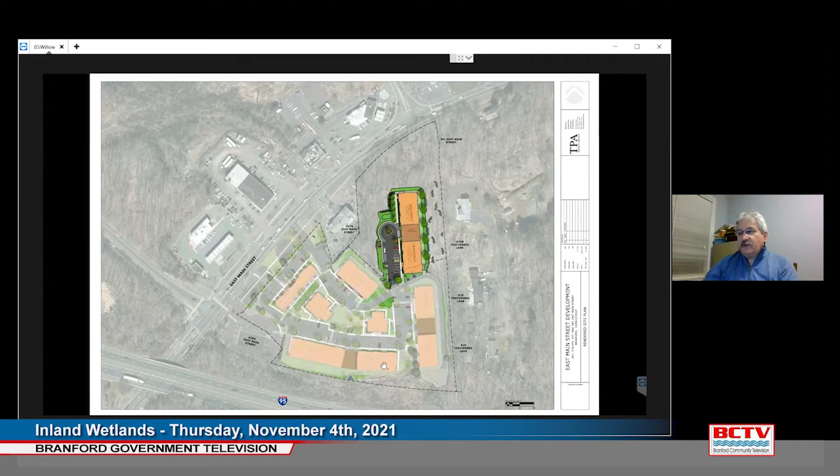Just so you have an idea of where things stand, Building A, which is parallel to Route 1, is substantially well along. Building B behind it is out of the ground and being framed up, and they are doing site preparation to get ready for Building E. The existing remainder of the Days Inn is still present along the wetlands on the southerly side of the lot. There's not going to be demolition of that until they get a little bit farther along.

So the reason that we're here before you, this is an expansion of the project. It does represent an additional disturbance of roughly 1.16 acres. The majority of it is on the 383 East Main Street lot, with a small portion on the 375 East Main Street lot to facilitate the driveway connection and a portion of the building.

There's no plan to further develop the site. The northerly portion is very steep, very rocky, characterized by very shallow ledge and bedrock throughout the property. The feasibility of a roadway connection onto Route 1, and the extensive amount of rock removal that would have to be done to do any further development, really preclude anything else. It would take heroic measures and high costs to do much more with the property. So this is pretty much where the developer expects to go with the project, and hopefully you won't see me back here again about this anytime soon.

One other minor matter I want to point out: as part of the review process with the DOT to obtain a permit from the Office of State Traffic Administration and the local district, they are requiring us to install a right-of-way fence along the southerly limit of the property. They had originally asked that it be on the property line. We pointed out that that would push it directly through the heart of the wetlands. They have agreed that it can go along the limit of disturbance along the southerly portion of the lot, and it will not represent additional disturbance activity because it will be installed within the limit of the previously approved clearing and disturbance area.

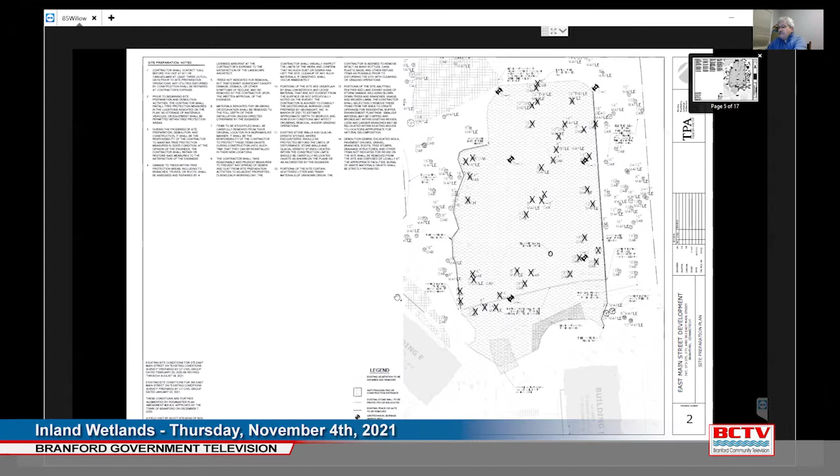That's correct. What we're proposing, there's going to be a gate right at the outlet, the level spreader, the energy dissipator for the stormwater system, so that they can have access to clean it out. The fence will wrap around the energy dissipator instead of cutting across it, so it doesn't have trash or brush or anything else causing problems.

The other gate is just off the screen. It's near the area where we'll be removing an existing pipe discharge into the wetlands and doing a wetland restoration, so that they'll have access to the wetlands for maintenance, but also to monitor that area until it's well established.

Mr. Sacco: building F, what is that hashed area to the left of building F, the top one, this area up here? That's exposed ledge, an extensive area of exposed ledge identified by the surveyor. Similarly, there's an area behind building E as well. It's a very rocky area. We're not proposing to do any disturbance in that area.

Mr. Sacco, Melissa Papantonis, Commissioner.

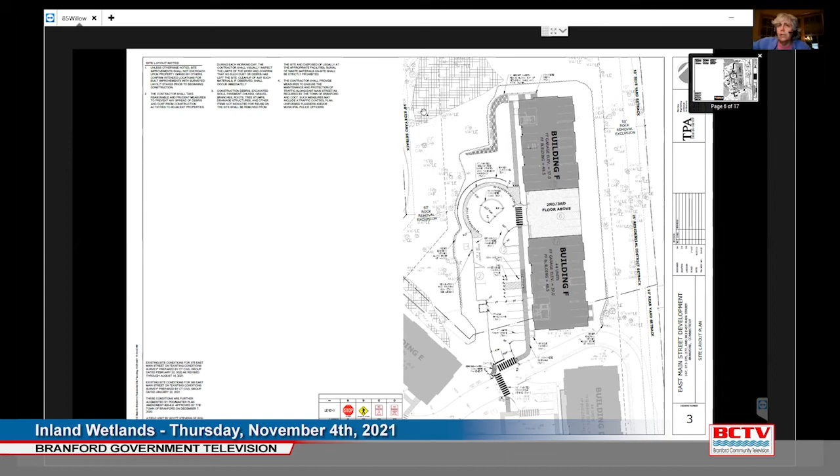The property where you're talking about the fence, the right-of-way, is that part of this lot? Who's the owner of the property with the right-of-way? The right-of-way is the Interstate 95 right-of-way. I understand, but the right-of-way runs over property that belongs to someone else, as I understand it. The fence will be built on property of the developer. There are two entities: Metro 375 LLC and Metro 383 LLC. They're under common ownership, so the fence constructed along the right-of-way is being built on land of the developer and under his control.

Okay, thank you. That was the compromise to allow us to build it without having an encroachment into the wetland. It seemed unnecessary.

Commissioner Bassman: the stormwater from building F is treated how? That's the next topic for discussion. What we're proposing to do, because the area of building F is largely underlain by shallow rock, it's a very difficult area to do any kind of stormwater infiltration. We are proposing one small rain garden. It's essentially going to capture runoff from really the lawn and the hardscape immediately in front of the building.

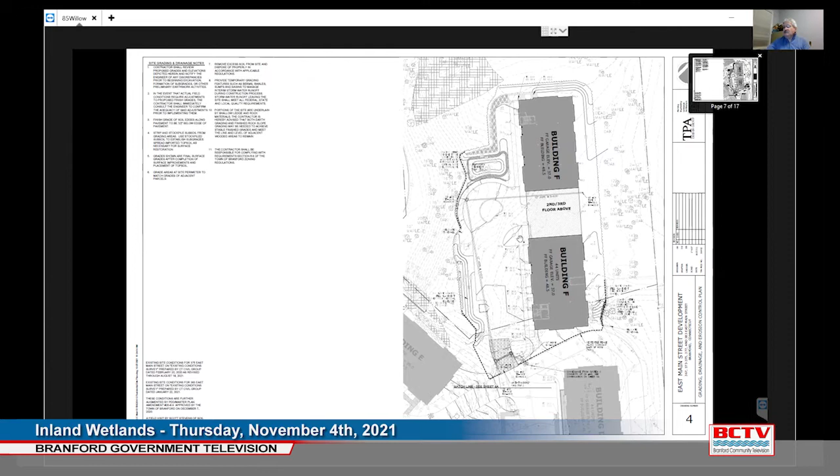So that's why, and really the main reason we're here before you for this presentation, what we're proposing is to put the stormwater into an area where it makes sense, an area where it realistically can be infiltrated. It can have the proper function in terms of the stormwater, and maintain minimal impact on the receiving water and the surrounding area.

Commissioner Bassman: does that larger number of galleries allow you to meet the 1 inch, first 1 inch of rainwater regulation? Yes, it does. For the entire development, the water quality volume we calculated is 20,715 cubic feet. With the additional retention volume, we would be providing a total of 24,504 cubic feet of retention. There is additional storage beyond that—12,000 cubic feet of detention where the water level rises and begins to overflow out the outlet. But in peaks during a severe storm, there will still be further attenuation because of the surplus volume. We're increasing the amount of retention from the original proposal by 4,400 cubic feet, more than accomplishing what is required under the regulations.

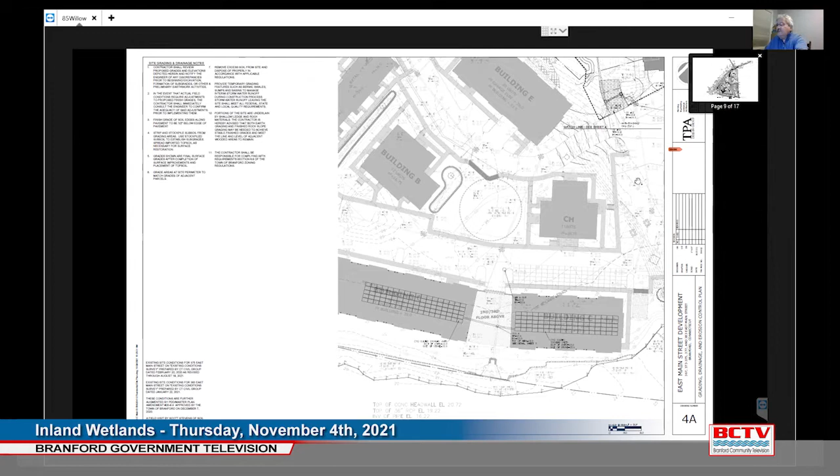Just to follow up on that quickly, I wanted to point out this is the existing pattern of where water goes, not only from the original development, but from the new lot. Things get a little more complicated because a portion of the 383 lot has been draining down into the wetland anyway. A small portion in the center drains to the car wash lot, entering the storm drainage system there and onto Route 1. The northerly portion of the site drains directly to East Main Street, entering the stormwater system. It all ends up flowing to the Branford River through this stormwater discharge from Route 1.

This is the breakdown of the proposed areas. Essentially, a slightly smaller area is going to the car wash, so we have less runoff reaching that lot. The area going to Route 1 is nearly identical, very little change there. A small additional area where the north end of building F and the turning area is being added flows south into the storm drainage system through the retention area and into the wetland south of the site, which then overflows back into Route 1 and again toward the Branford River.

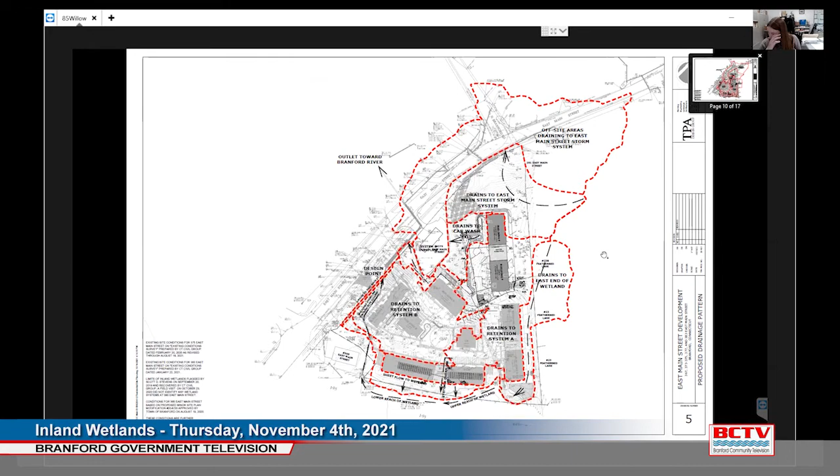Jamie Frederick, the wetland agent: I just want to mention that the fee was based on the additional area of disturbance beyond what was originally approved in the first application, so the commission understands how it's been calculated. It doesn't include the total area of all the new activity. However, the area of new activity not included is an area that already had a fee paid for review of disturbance previously, and all the new area of disturbance associated with the project is beyond the 100-foot upland review area. So it seemed like a reasonable way to process the fee. However, it might be a slight deviation from the truest interpretation of the regulations. I just wanted to see if the commission had any feedback on that.

Melissa Papantonis, Commissioner: I'm sorry, it sounds like you were saying that. So if I understand correctly, the fee was calculated so as not to essentially double dip on the same property, but to apply the fee in a way that meets the purpose and spirit of it, without charging them for the same development on the same land twice. I think that's a fair way of surmising what I was trying to say. That makes sense.

This is David Sacco again. Just so you understand, the area for the fee calculation is based on this additional disturbed area right here around building F. It's roughly 50,500 square feet. So the fee previously paid was based on the disturbance throughout the remainder of the site, and the basis for this is now this disturbed area extending across both lots, predominantly on the 383 lot.

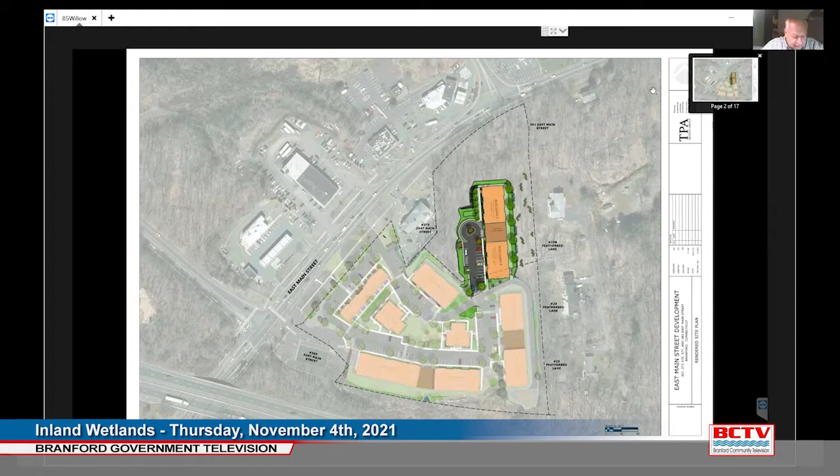Next up, Inland Wetland 211101, 3-7 Rockland Park, restoration of a wetland area and pond, including the removal of invasive species and the planting of native plants.

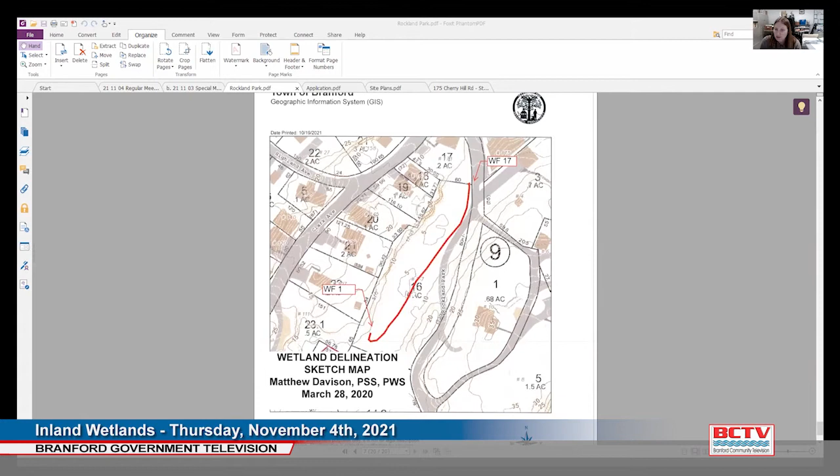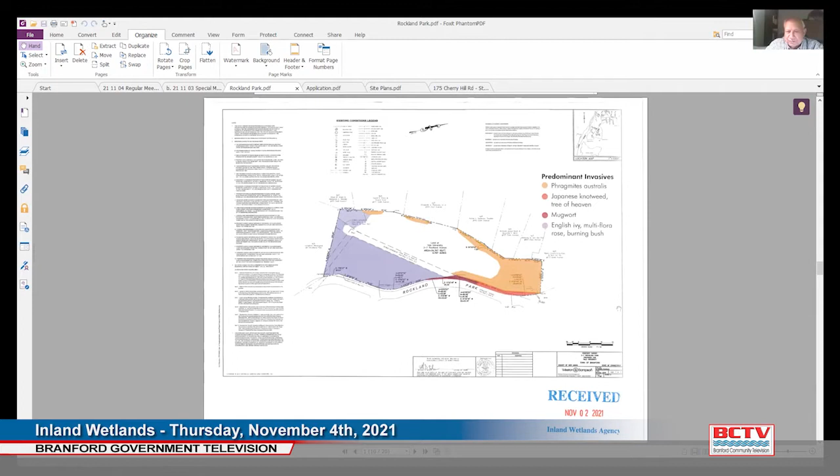Do we normally require delineation when work is going to be conducted that close to the wetland? Jamie Frederick, Inland Wetland Agent. In addition to confirming the extent of the wetland along the west side of the property, there's the question of whether or not the wetland delineation needs to be added to the survey.

The areas highlighted on the survey right now have been highlighted by the applicants as estimated areas of where the invasive species are and the areas that would need to be replanted based on that invasive removal. So the question is, do they need a more formal plan regarding the spatial aspect of what they're proposing to do, or is the information provided sufficient for the commission given the type of activity they're proposing to do?

The other question is that the fee is based off of the area disturbance in a wetland and the total area disturbance overall. So not having actual areas does make it difficult to calculate that fee. However, they have also requested a fee reduction, and the commission has had a past practice of reducing the fee on applications like this based on the environmental benefit of the application. I'm getting ahead of myself here, but they're all interrelated topics.

Commissioner Bassman. I think this is the kind of project we love to see taking place. Love the initiative behind it, the professionalism in which it's being reviewed. So to the extent there's an opportunity to do this at some kind of reduced cost or fee, I think we should seriously consider it.

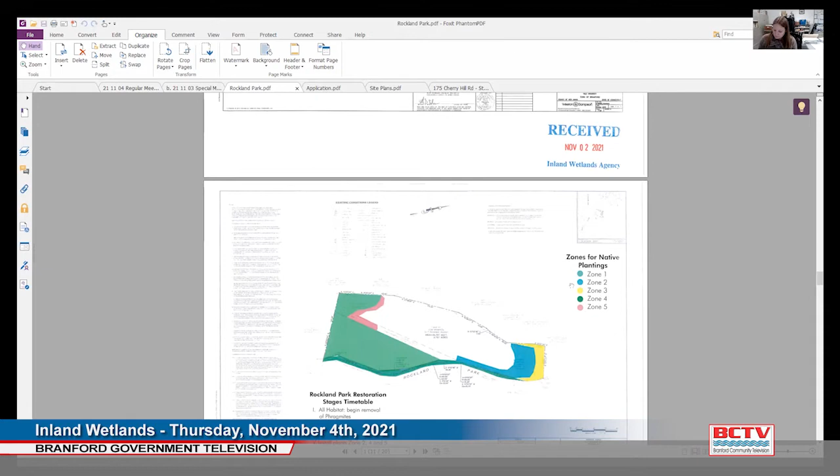Commissioner Bassman. I think what you're saying is for projects that are even conservation-based, we have a monitoring period that we look to be part of the project, and I would see this would be no different. Jamie Frederick, Inland Wetland Agent: in the past, the commission has taken the 5-year monitoring requirement for wetland mitigation and kind of applied that to these types of projects, sometimes reduced down to 3 years. Given the scope and size of this project, the 5 years would be appropriate, especially since there's parts of it that aren't going to start in year one.

Commissioner Bassman: if it was a fee reduction only, in my mind you'd wait until December to see that Mr. Davison has had an opportunity to delve into the project and specifically look at the plantings and the density of the plantings, et cetera, and then consider a fee reduction. But I think the issue of the delineation we're facing now, we can't wait till December for that. Am I correct on that, Jamie?

Jamie Frederick, Inland Wetland Agent: I'm not sure I understand the question. Well, if we're going to talk about a fee in December, we either have to have a delineation or not, and we need to make that decision tonight, not in December.

Correct. This is Commissioner Boda. I want to speak to that for a moment, because when we're looking at regulated activities that have a direct impact to the wetland, if we look at the state statute and the preamble of the purpose of the Connecticut general statutes around protecting inland wetlands and watercourses, it's all about foreclosing future benefit. So the function of the delineation is to ensure that we're not losing even by small cuts here and there. And this particular application, that's not what's happening.

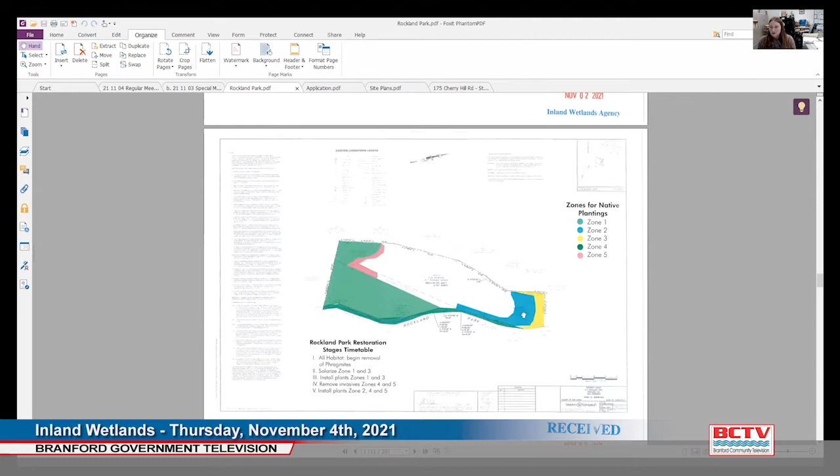Jamie Frederick, the wetland agent, says if the commission is comfortable, she can use the sketches provided by the applicant to calculate areas of disturbance. The applicant provided some calculations themselves, which she hasn't checked yet, but she could overlay the two plans to calculate the area of disturbance, and also use the wetland delineation to estimate how much fits in the wetland area.

Jamie offers that if the commission won't require a formal map, she has a high quality handheld GPS that's sub-meter accurate. She can collect points around the wetland and provide them to GIS staff to calculate the exact wetland area. It would be a fairly accurate representation, and from that the commission could subtract it from the overall property.

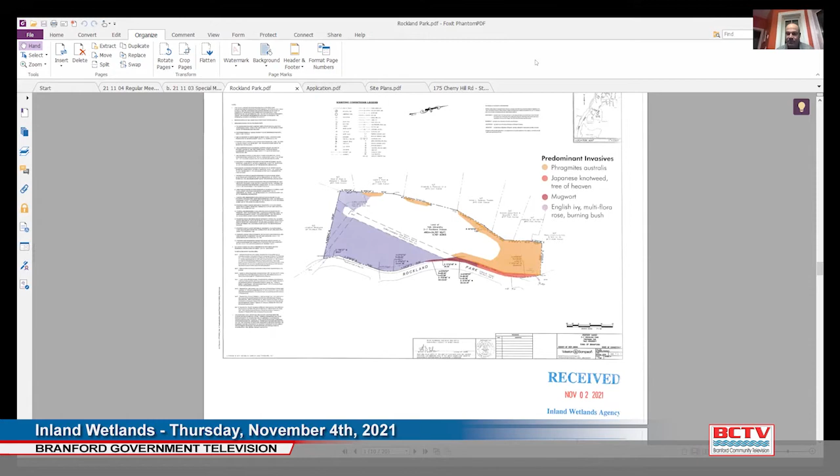Jamie Frederick says that sounds like a plan and would be helpful. Commissioner Papantonis agrees that sounds like a pretty reasonable solution.

Anything else on this project? Shirley, do you have another comment? No, my hand's still up there for some reason. Right, let's see if I can lower it for you. Thank you.

Any other comments from the commission? Again, Mr. Davison, thank you for the work you've already put in and what you've volunteered to do. It's certainly heartwarming to see that kind of participation.

Just want to thank the commission very much for the conversation and for the consideration. Yeah, thank you so much. You're quite welcome.

Finally, for applications for receipt: Inland Wetland 211102, 140 to 240 Austin Ryer Lane, DO 503-001C, the repair and replacement of a drainage outlet.

Jamie Frederick, the wetland agent, explains this application was submitted in response to a notice of violation issued due to corrections needed to a drainage system. The application came in late yesterday afternoon, so she hasn't had much time to review it, but the applicant is present, so she'll hand it over for the initial presentation.

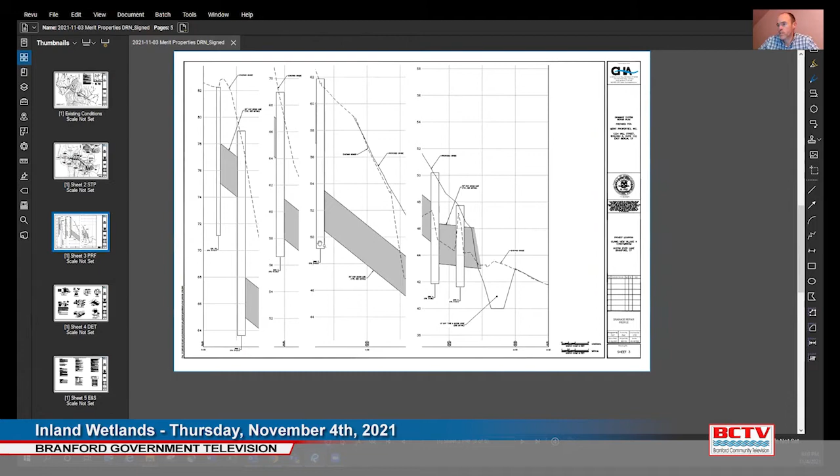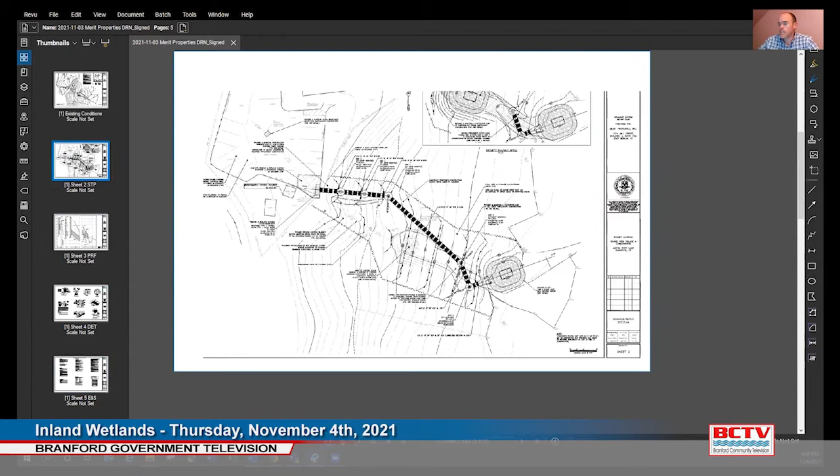And then just some standard details, catch basin manholes, the scour hole itself, and then notes regarding construction sequence, erosion controls required, and that sort of thing. It's reasonably straightforward, just a repair of an existing drainage system. If the commission has any questions, I'm happy to answer anything I can.

Commissioner Bassman: When would you look to do this activity? Obviously it's something that needs to be repaired. So it would be ideal to get this done over the winter when we're not anticipating any rain events that would make it more difficult to install this drainage system. Other than that, you'd probably want to stabilize it for the spring and then do it in the summer. But that's going to be dependent on how we get approvals and the funding end of things from the homeowners association.

Jamie Frederick: Jen, are you going to be able to access the site to do the work from this edge of the parking lot, or are you going to have to approach differently? We've walked this through with a couple of the contractors we work with regularly. It's certainly going to be a challenge, but rather than creating a bunch of additional disturbance cutting a road in from the side, working their way down the slope with excavators and heavy equipment is probably the best way to do this, even though it's going to require moving material twice to step it down the hill.

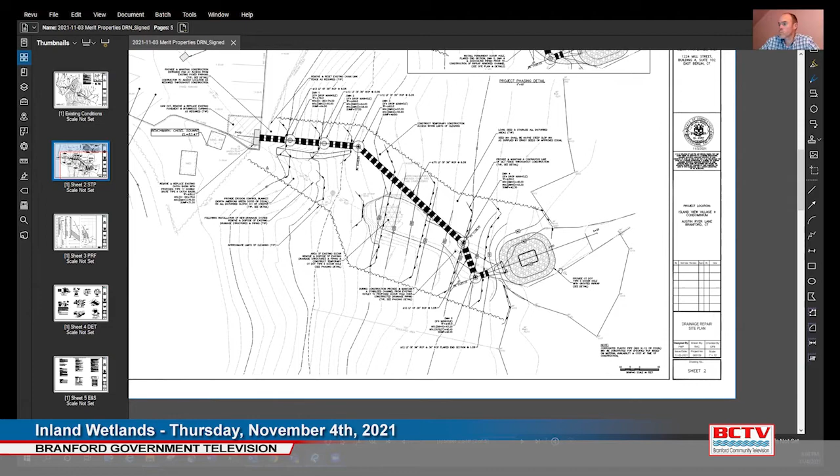I'm assuming that's the activity seen here within the intermittent water course. Actually, the direct wetland impact is just a little bit of grading here where the wetland pokes up in. So you did not include the activity within the intermittent water course in that calculation? No, we did not. I think that it should be revised to include the intermittent water course because that's considered a regulated resource. Okay.

Which is a bit of a catch-22 because I'm sure it exists in part because of the structure. Right, it only exists because of it, the outlet won't really exist once you've revised the outlet location.

Does the commission have any difference in opinion from what I stated before the applicant revises their calculations and submits the additional fee?

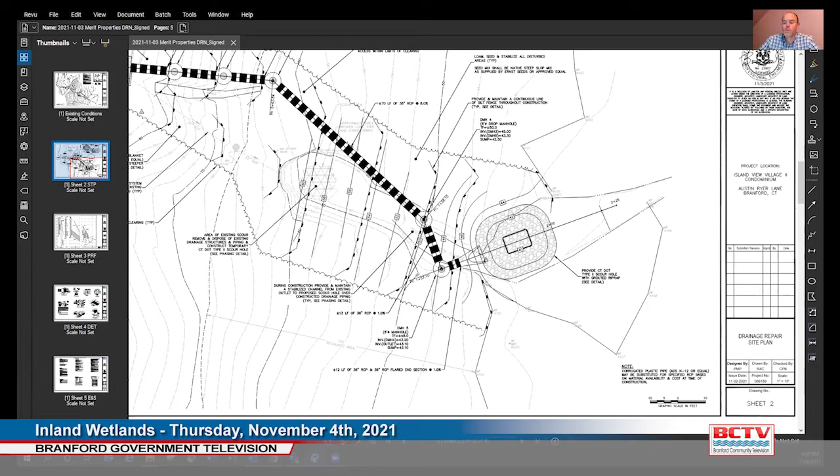Applications for review: inland wetland 210801, 175 Cherry Hill Road. It's an 11 lot subdivision. We have a fee assessment review for that application.

Jamie Frederick, inland wetland agent. Just to remind the commission, the fee review is relative to whether this application is a subdivision application with regulated activity or a subdivision application without regulated activity. Recently, the commission has been looking at subdivisions as subdivision without regulated activity.

So the application has been submitted as a subdivision with regulated activity, which I believe is the appropriate way to go. However, I want to make sure we're being consistent with practice and treating everyone uniformly and fairly. If the commission determines it's subdivision without regulated activity, the practice has been to make certain lots come back for individual approvals.

And at that point the fee would be reduced to $110 rather than, I believe, about $9,000 that has been submitted at this time. So I don't know if the commission wants to be refreshed on the application prior to further discussion, but I wanted to explain the fee situation before we dive into everything again.

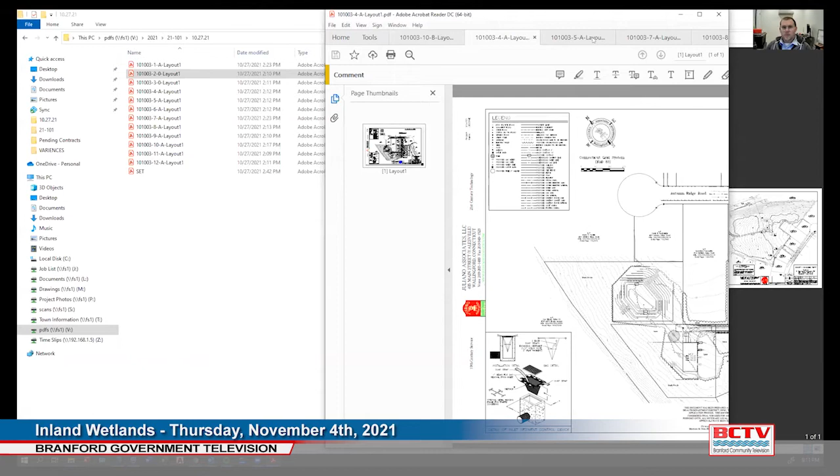Okay. Oh, can't do that. Okay. Can everyone see that? Yes.

Good evening, ladies and gentlemen. My name is James DeMeo from Juliano Associates. Our address is 405 Main Street, Wallingford, Connecticut. I'm here representing BC Investment Properties, LLC. As previously discussed, this is an 11 lot subdivision.

To quickly go over it again, I don't want to dive too deep since we already talked about it in previous months. It's an 11 lot subdivision, mainly coming in off Autumn Ridge Road, developing a new right-of-way and roadway. It's broken up into two sections based on grading and what fits on my plans.

The first section is lots 1, 2, 3, 10, and 11. This is pretty much the highest elevation on the property, so actually the elevation will go up from Autumn Ridge. We have a series of catch basins and a pipe network that will capture the water from the upper lots and send it to a detention basin, which I call the northern detention basin.

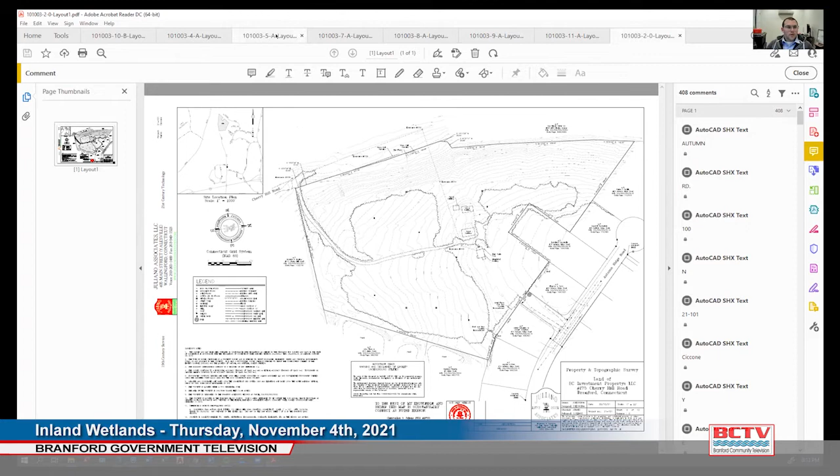However, we have Autumn Ridge here, Cherry Hill up here on the western side of the property. We have 3 small ponds in this direction, and there are wetlands to the west of the property, but those are a few hundred feet away, at least 500 feet from the property. There's additional space in between disturbances because we're not developing all the way up to the property line.

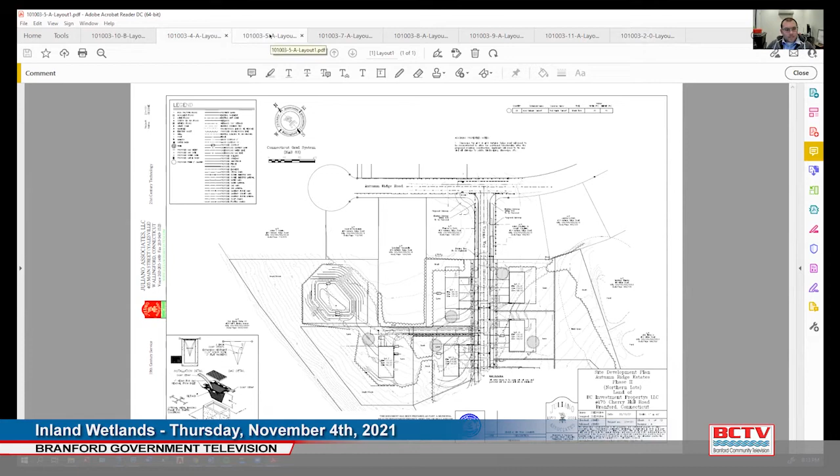As per previous comments with town staff, storm drainage was reevaluated. Perc tests were done in the areas of the detention basins, and the NOAA Atlas 14 rain data was used. And what ultimately that did was...

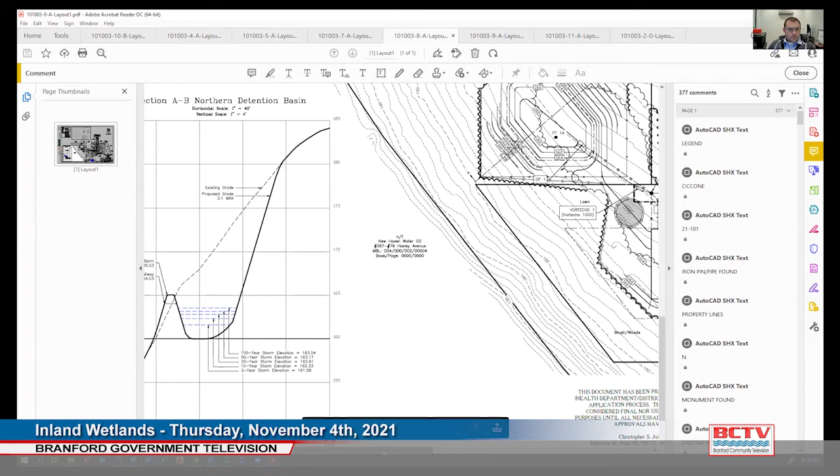This system, the northern detention basin, at the 100-year storm elevation, is holding all of that. There is an emergency spillway at 164.03. At the 100-year storm elevation, it's 163.54. So we have almost half a foot before it even comes out through the emergency spillway during the 100-year storm.

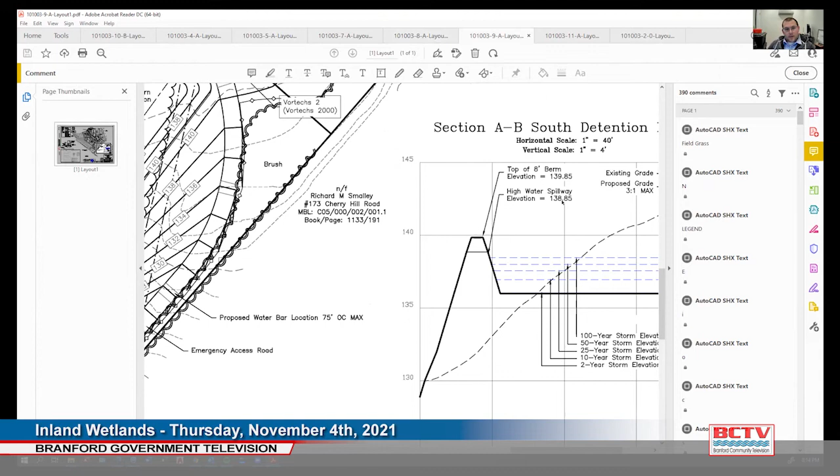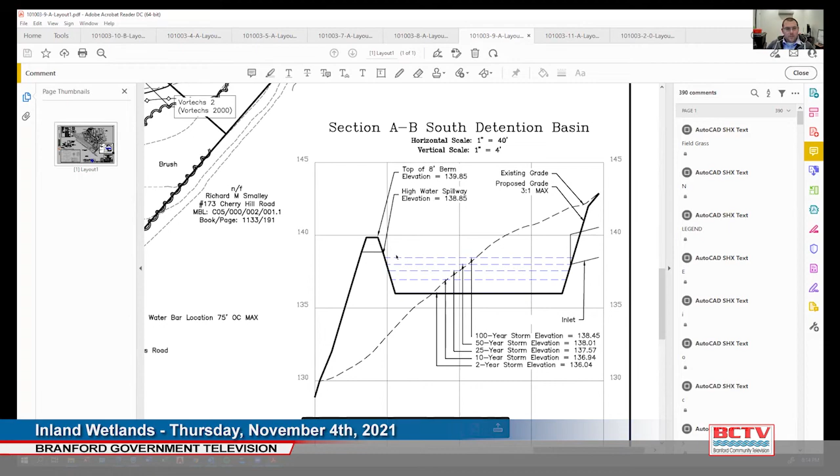And for the southern detention basin, something similar: the emergency spillway is at 138.85 and the 100-year storm at 138.45. So just under half a foot, about 4 or 5 inches below, is where that elevation will be.

In terms of comments from staff and commission members, I will go over them.

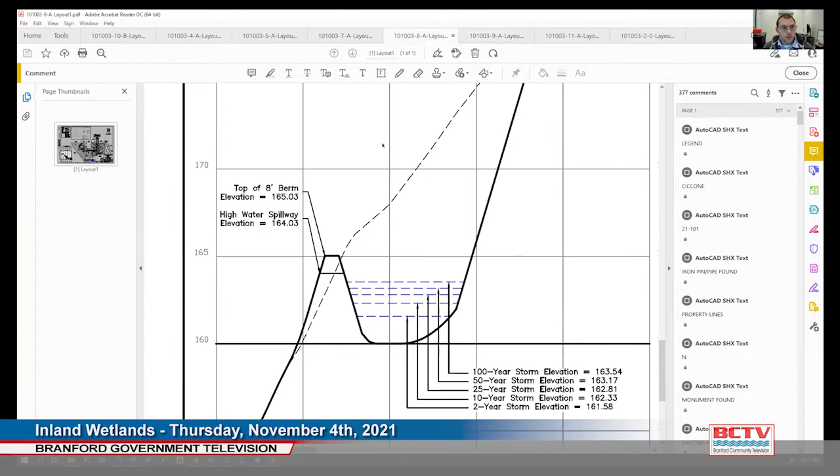One of the comments from the previous meeting was addressing the first inch of rainfall and attempting to infiltrate it. We're capturing all the roof leaders now, directed into our detention basins, as well as, if feasible, the driveways. On the southeast side of the road, these houses are set a little lower than the grade, so it's difficult to capture roof or runoff in the driveways and channel them into the catch basins. However, we are channeling the roof leaders into it, so we're capturing as much as feasibly possible into our storm network and into our detention basins, which we are detaining and infiltrating up to the 100-year storm.

Perc tests were conducted and our detention basins were redesigned with this information. The northern detention basin had 1 inch in 50 minutes, and the southern had 1 inch in 60 minutes.

One of the other conversations was who will maintain the detention basins post-development. What will end up happening is what's called out as open space will be owned by the property owners. We will create an association with these 11 lots who will then basically maintain all this open space on the property. So it will become their responsibility in the future.

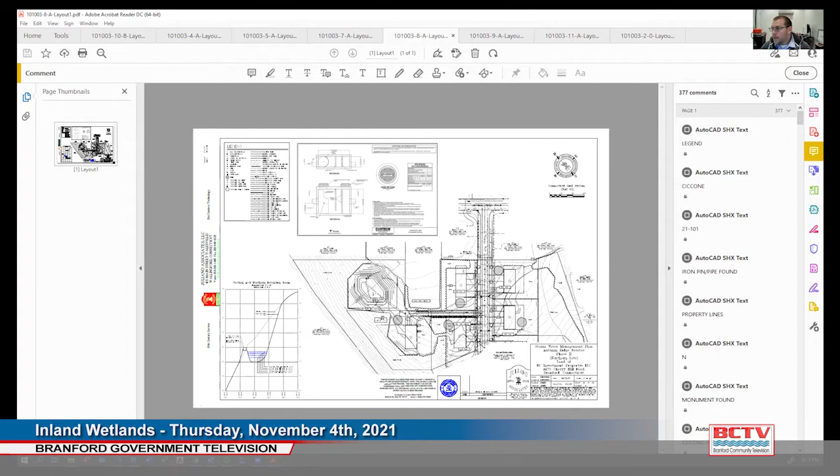The commission may want to consider using NOAA Atlas 14 data. That has been done, and drainage has been revised. Erosion control measures need to be added to the plan, such as anti-tracking pads and erosion controls for the emergency access road.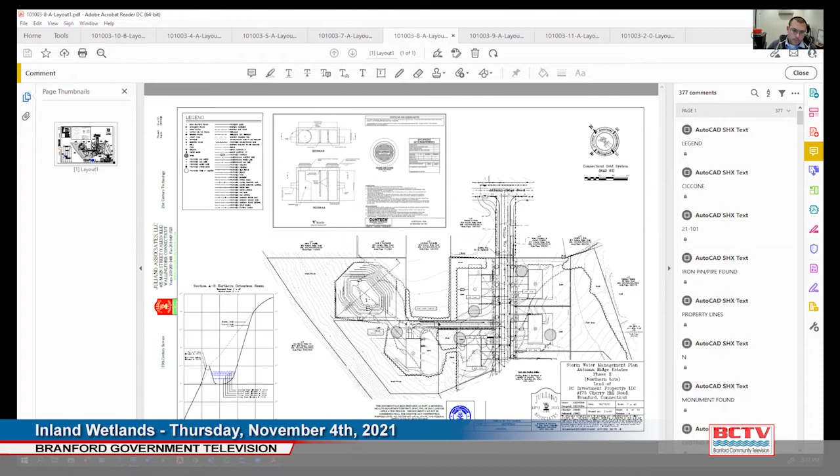We have added anti-tracking pads at the entrance for each driveway, and topsoil or material stockpiles for each lot. One of the major concerns is actually the emergency access road, which will be our main entrance for the construction of the project. It will disturb the least amount of residents nearby, using Cherry Hill Road instead of Autumn Ridge, which takes it through less of a residential neighborhood.

So our anti-tracking pad is going to be installed at that entrance. We will also have water bars. One comment is that it appears the water bars would shed onto the other property—that's not necessarily the case. I will make sure the plans are revised to further indicate that the water bars will shift the water onto our property instead of onto adjoining owners.

One other concern of the commission was the snow storage location not impacting existing or the proposed stormwater system. For the most part, it's a standard town road; the right-of-way width is able to accommodate the snow along the sides without negatively impacting the storm drainage. The only area of major concern is the cul-de-sac, but we do have enough room to store snow above the southern detention basin if needed, though it shouldn't necessarily be a problem.

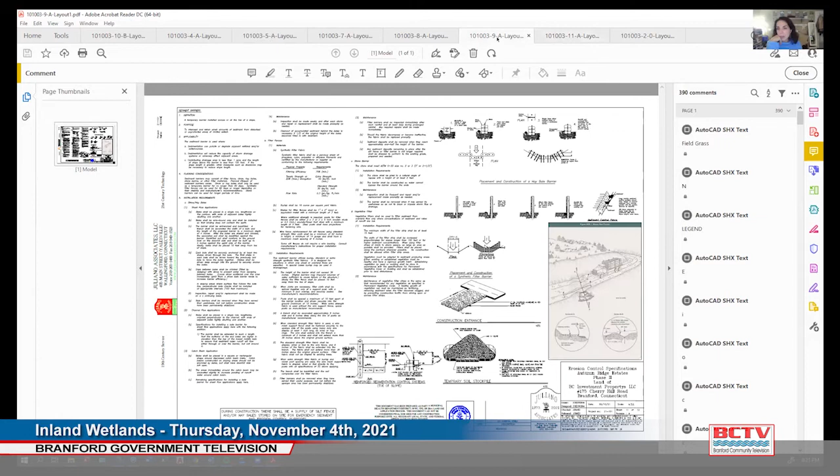Commissioner Boda asked, is that in the construction sequence section of the site plan—that the roadway and stormwater management come first, and individual sites will be cleared as they are being built, so the entire site will not be stripped of vegetation and graded all at once? I don't believe that is specifically denoted on the plans, but it can be, if that is a request of the commission and town staff. That is absolutely not a problem.

Commissioner Boda continued, there is typically within the documents, within the site plan itself, a construction narrative and sequence. I'm looking at the map here—the construction narrative sequence includes information like the monitoring of sediment and erosion controls, and the preliminary construction conversation. That's a typical sheet included in these plans that I don't see here, and I have a full plan set. It looks like a full plan set.

Jamie's staff report did denote that as part of conditions of approval, talking about the meetings, pre-construction meetings and everything like that. And that's obviously not an issue to supply.

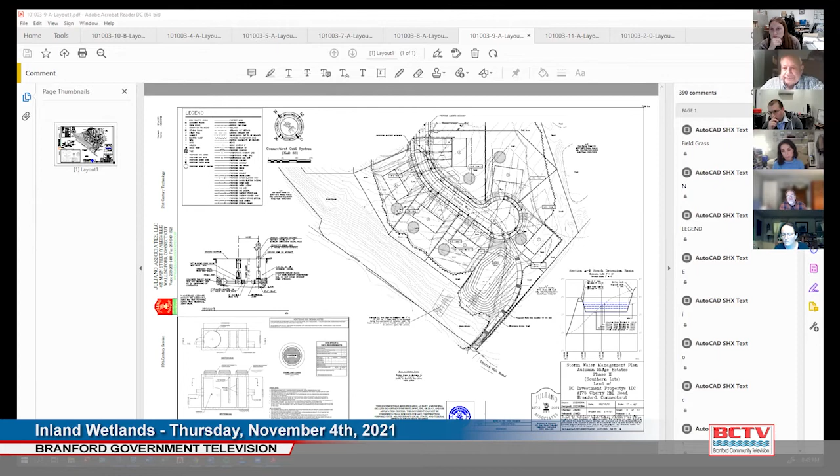Jamie Frederick. Go ahead, Jamie. Jamie Frederick, the wetland agent. I was just going to add that I also had suggested to the applicant that the maintenance documents for the homeowner association include any proposed maintenance of the open space areas, particularly as the eastern open space area is currently kind of a meadow type state.

If the intent is to keep it in that state, then the maintenance plan for doing so, such as mowing twice a year, whatever it be, should be presented. So that way, particularly as that is in the upland review area, that activity doesn't have to come back to the commission at a later time.

This is Commissioner Papantonis. I have a question about the association versus, did I remember at the last meeting, did you talk about that land going to the town and now it's going to an association? Or did I misunderstand what you said last time?

So after speaking, especially with the town engineer who pretty much had a strong opinion, yep, the town wants no responsibility for the detention basins. This is our solution.

Okay, well, that's kind of an important fact, isn't it? That you consulted the town engineer and the town engineer wanted no part of it. Wanted no part in the future. Yeah, to have for the city or the town to be responsible for future maintenance. Yes.

Inland Wetland 210901, 56 Stony Creek Road, installation of a fence around the wetland. Jamie Frederick, Wetland Agent.

I have a request that this item be tabled. They were supposed to meet with the state regarding the extent of the requirement yesterday - that did not happen. I think they're currently in talks again about having the requirement waived, which might result in a different application. So ultimately the request is that this be tabled to the December 9th meeting. Couldn't happen at a better time.

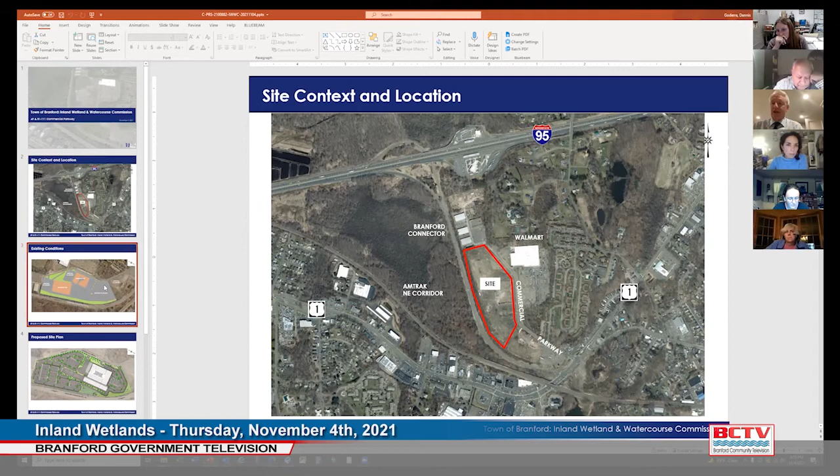As we noted, this is the only zone where this use is permitted, and this is the only property in the zone, so this site has been specifically targeted for this use by the town. We are making significant improvements to stormwater quality, reducing the rates of runoff from the sites, reducing the total volume of runoff from the sites, and we're doing this by reducing impervious coverage, infiltrating a portion of our stormwater, complying with the MS4 requirements, and minimizing any risk of downstream flooding.

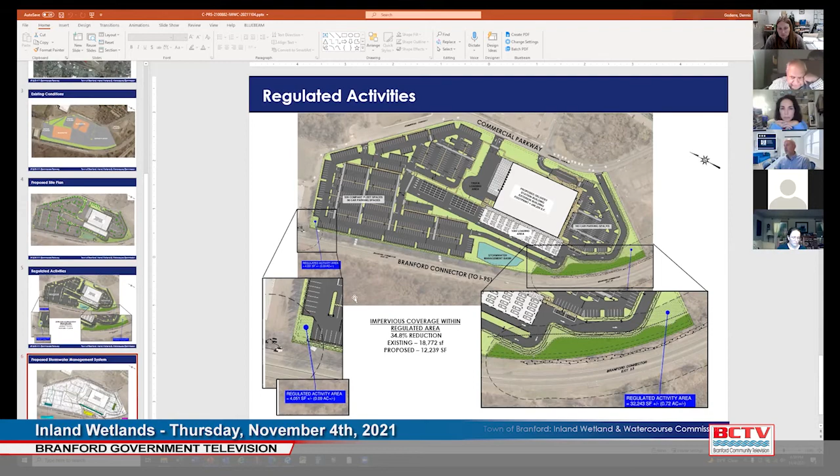So the flow from the roof comes down on the canopy, and then the roof leaders come down along columns and then enter into the system.

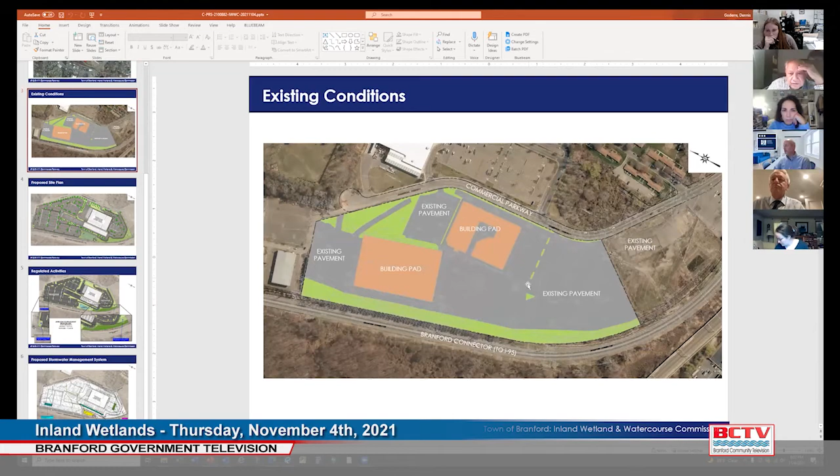It's a combination. If you go back to the existing site plan, you can see all of the pavement, with no islands within the parking areas. Compare that to what we have here, we have much more green space within the islands and planting beds. There's more of a buffer area within the upland review area, so that's another location where we're reducing the impervious surface. It's a combination of different items.

Okay, Commissioner Bassman again, speaking to the asphalt, when you tear up that asphalt, I heard yesterday at the site walk that it would probably be left on site for a bit, stockpiled. Do you have locations for where that asphalt is going to be stockpiled? The concern is that it not be stockpiled near the watercourse.

I'll turn it to my colleague Jeff Dewey to respond. Good evening, Jeff Dewey, BL Companies. Yes, on the erosion control plans, we have a series of stockpiles called out. We locate them as far away from the wetlands as practical. We don't specify which one is asphalt necessarily, we just call them material stockpiles. We could certainly dedicate one to be a stockpile for pavement materials if the commission deemed that appropriate.

Follow-up question, Commissioner Basserman: do you tear up the asphalt section by section, or do you do it all at once? What is the plan, and does the plan indicate that?

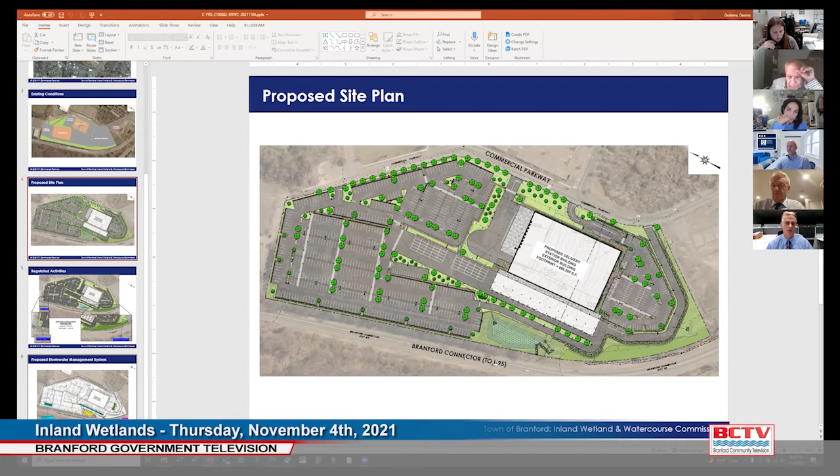Jeff Dewey from BL Companies: Jamie, you are correct. The eastern portion of the roof, approximately 1/3 of the roof area, 2/3 of the roof to the west, and the entire canopy area all go into the surface detention basin, which is treated for water quality with 100% water quality volume retention and eventual infiltration.

The 1/3 of the roof area to the east, we determined to just pipe it directly into the existing piping system. Our thought process was that roof water is considered relatively clean runoff water, so it would not need to be treated. We were providing enough detention that we really didn't need additional detention, because we are significantly reducing the peak rate of runoff as well as the volume of runoff to the site, and that's combined with the fact that we are also reducing the amount of impervious area. Additionally, the current site doesn't have any stormwater management with regard to water quality or detention on site, so the amount of improvements we are making to the overall stormwater quality and quantity from the site greatly outweighs sending a little bit of the roof area untreated.

Jamie Frederick, the wetland agent, to follow up on that: was that done because it could not be sent to the underground detention system in the parking lot, or simply because of the reasons that you just identified?

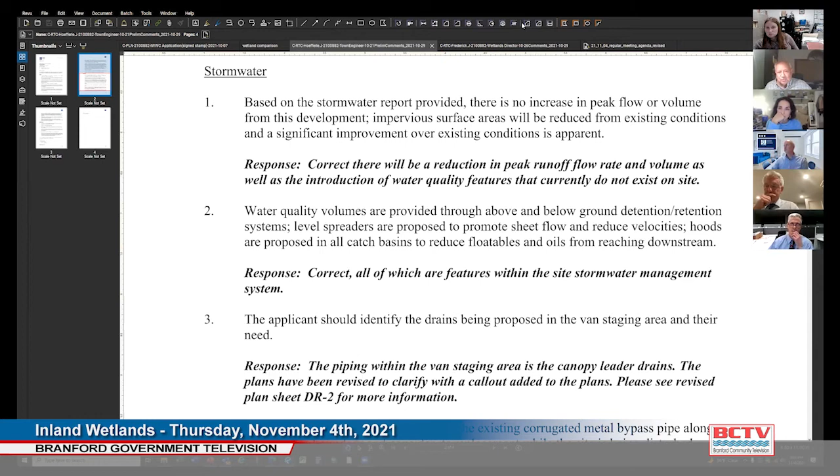Thank you, Commissioner Baskin. Jamie, were you looking at the town engineer for something other than that comment? I might just ask him to clarify specifically whether he reviewed the aspect that part of the roof is not being sent to any sort of on-site retention or treatment, just to confirm. And if he's satisfied, then I can bring that back to the commission.

I think the easiest thing is just to get an answer from the town engineer. I don't know that we need to drag it out without having additional information at this time.

Mr. Chairman, we're happy to follow up with the town engineer. I'm confident that we can demonstrate compliance with your regulations. Your regulations say where possible and where feasible, and the DEP stormwater manual is guidelines, it is not mandatory. So I'm very confident that we can demonstrate in December that we will comply with all applicable manuals and provisions with regard to stormwater. And I think candidly, we meet or exceed any of those requirements, and we're happy to follow up with the town engineer and provide any other documentation necessary to demonstrate compliance with the 2004 Stormwater Quality Manual.

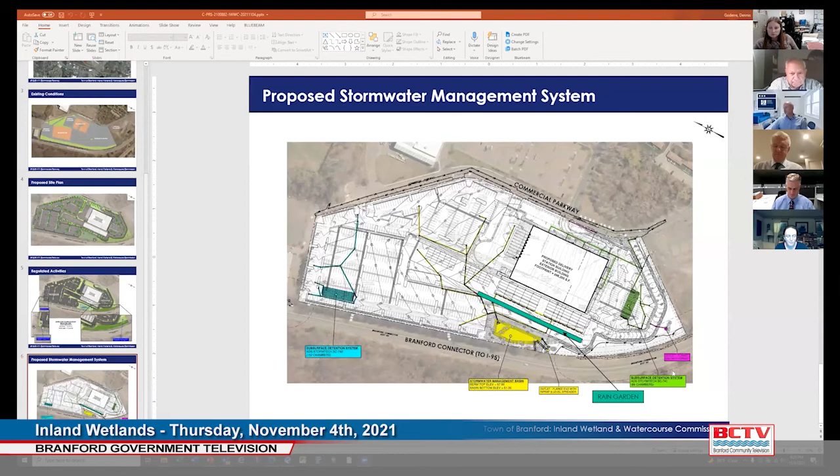Thanks, John. I'll try to keep it brief with the understanding that the wetlands are essentially created and off-site. I did give a presentation about the wetlands at the last meeting. As was discussed, the wetland resources are essentially two roadside swales, one located off the northwest corner of the site, and another located off the southwest corner.

These swales were created. In terms of wetland functions, they provide water quality functions at a high level, as would be anticipated for a feature created to capture and handle stormwater, densely vegetated, with not super fast gradient, so water generally moves slowly through those wetlands. The only potential impact would be temporary wetland impacts during construction, which I honestly don't foresee given the location of the work relative to the wetlands.

We are introducing a discharge point to the wetlands. However, the stormwater we discharge towards those wetlands will receive primary treatment through the basin there.

The existing upland review area on the site has for the most part been entirely disturbed, whether it's remnant bituminous or a graded fill slope. For anyone on the site walk, you can see it's bermed up in the back there. There's an Eversource distribution line running through there that drops down into the swale. All of that area has been manipulated at some point. The proposed development would reduce impervious coverage within the upland review areas.

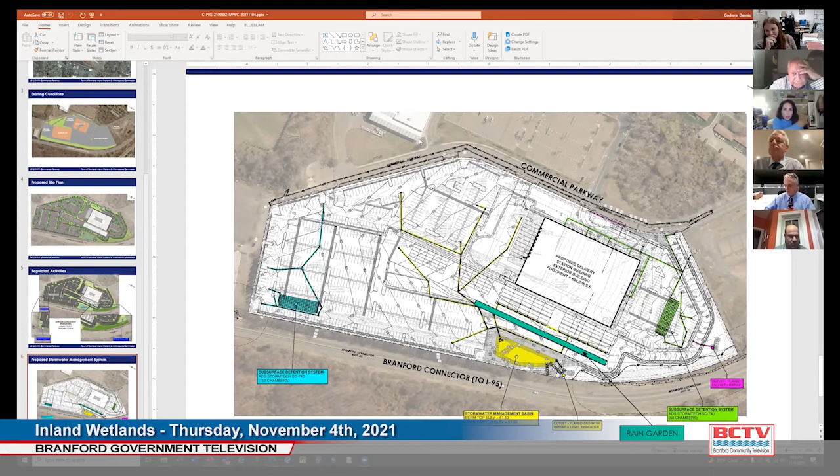Okay. This is Commissioner Boda. Mr. Davison started talking and we kind of went back to the stormwater, and I was hoping you could talk a little bit about the plantings intended for the rain garden. Could we get a little more detail? And within the stormwater basin, if there are plantings in there, if it's low grass, what the intention is there.

You know, I don't have that information in front of me, actually. The planting plan, I know I reviewed. I did not take part in the design of it, but my recollection was that I was happy with it when I did review it.

This is Jeff Dewey from BL Companies. If it's fine, I could speak to what the actual nature of the plantings are. As an engineer, you're going to talk about the plants? Well, if you want to say what they are, I'll comment live here. I can pull up the landscape plan if that would be helpful. I have the landscape plan right here, I'll pull it up.

The plantings, and I'm a landscape architect registered here in the state of Connecticut, so I can certainly add input as well. The planting is a conservation mix, more of a native seed lawn mix, and also a wet seed mix. I can pull up the exact mixture, it's something we use all the time for these conditions and it's very suitable. Native planting to help support habitat for bees or insects as well. It's really more of a lawn area that's a swale with hardwood deciduous trees planted in there. We can certainly enhance that. There are some areas of woody shrubs to help with water quality before it enters any basins. That's the overview and highlights.

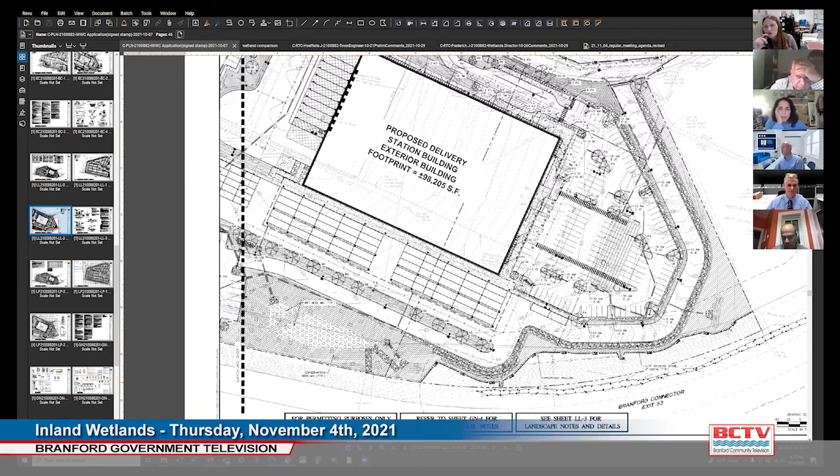The systems up here all go into this detention area and then stay underground to the existing pipe systems. So Jeff, it was just this discharge, and then there's a discharge over here.

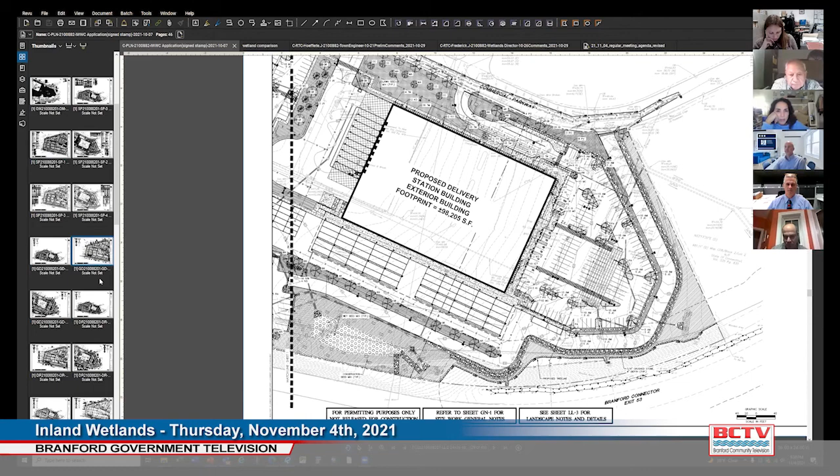Yeah, so those discharge points, the one from the basin, is that heading then toward the wetland? And then the one that was in magenta, where is that? Is that also heading toward the wetland? I can't tell from this drawing and from the last drawing, it just sort of ends. I don't have a sense of once it goes at that flared end, where does it go?

This is Jeff Dewey from BL. You are entirely correct, they will drain into the wetlands. What we have is after the outlet, they go into what's called a level spreader, which encourages putting the flow pattern from a point discharge back into a sheet flow pattern. So it'll be a non-erosive velocity, but they will drain into the wetlands.

As a project team, Matt Davidson again for the record, we did discuss that outfall location, and I do like where it's situated. I think situating it above the tip of the wetland maximizes the potential for that wetland to provide additional stormwater treatment. It'll be clean water coming out of there, but introducing it at the tip and allowing it to continue to filter down through that system is better than releasing it down at the very bottom end of that swale where it's receiving less treatment. The swale is essentially another stormwater feature. It picks up most of the hydrology in that swale driven from runoff directly from the connector.

Commissioner Boda: I think that's helpful. Going back, I appreciate the concession about putting the remainder of the roof, because we were talking about pollutants, but I think in addition to that, we think about water temperature as well, and making sure to treat that water so that within that first flush, it's about particulates but also about temperature. Thinking about a large roof getting very hot in summer, that makes sense, especially if the discharge ultimately makes its way to the wetland. It's got time to cool down. We don't want to deoxygenate whatever is there because all of a sudden we've spiked the temperature, which is typical with a summer storm.

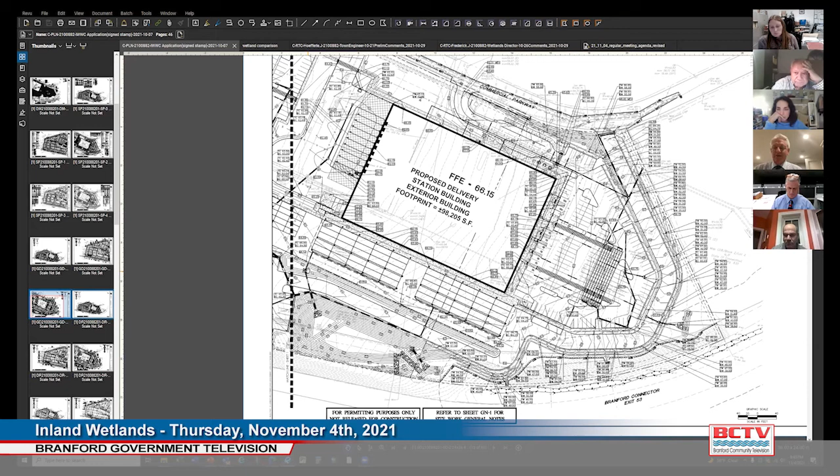Mr. Chairman, as I noted, we would be more than happy to accept a condition of approval that the changes we're proposing this evening be approved by your town engineer. So, candidly, we'd love to get to a vote this evening if that's possible. I think Jeff, Dennis and Matt have done a great job describing the ways in which we exceed the requirements, particularly for a redevelopment site. I think you can see the level of care and diligence and thoroughness the team has put into this application. Listen, I think at this point we're sort of not even dotting I's, it's even less than that, and we're happy to work with your town engineer to finalize the last few details of the plan.

Yeah, I guess it's better practice, however, that when we vote to approve or not a plan, we have the complete set of documents in front of us. And as it exists today, we couldn't look at a plan today and see that. I guess it might get to what Commissioner Boda mentioned on a previous application, which is at what point is a condition of approval a minor add-on to a plan as opposed to an integral part of the plan. I think what we've talked about with the roof and the stormwater treatment, and this resizing of the green area, to me that starts to say we need a different plan than maybe the one we have in front of us to vote.

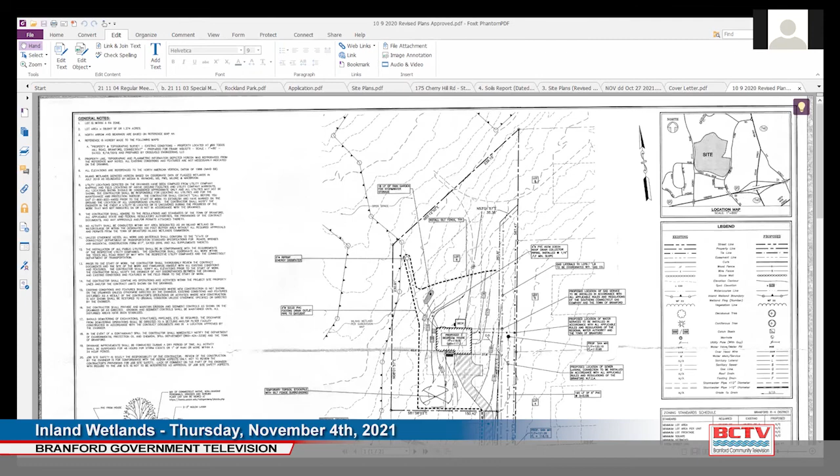Mike Frieda, 81 Todd's Hill Road. Can everyone hear me? Okay, great. I purchased this property back in April from the Vigliotti family. Everything's been great with the house so far, except for the stress that this particular swale has given my family. We have a swale smack dab in the middle of our backyard. You dream of having an in-ground pool, but not one of this nature. It doesn't drain—it sits like this for 3 or 4 days after a rainstorm. It's frankly a safety hazard for me and my family. I have a 2-year-old daughter and a newborn on the way in January, and I worry about my children running into this and something serious happening. So what I'm proposing is to move this about 20 to 30 feet to the left towards the back of the lot. There is an existing curtain drain that flows out, which Jamie can probably show on the map. It's not anything major—we're just trying to get this out of the middle of our yard and off to the side where it doesn't disrupt our daily activities as a family. Thank you.

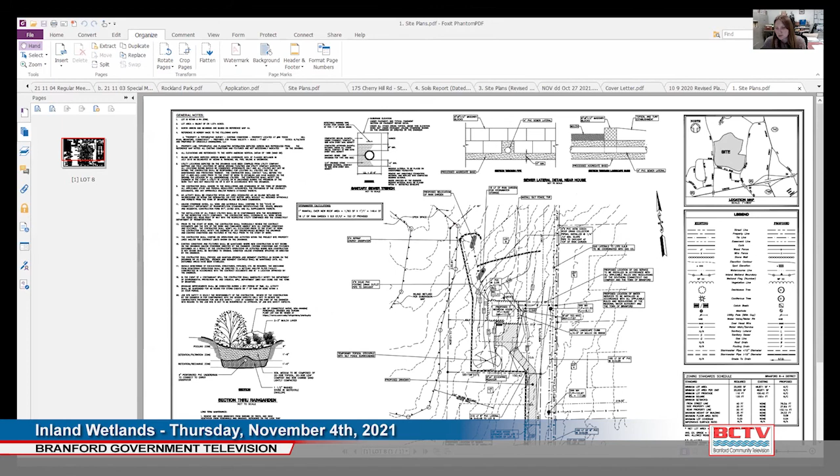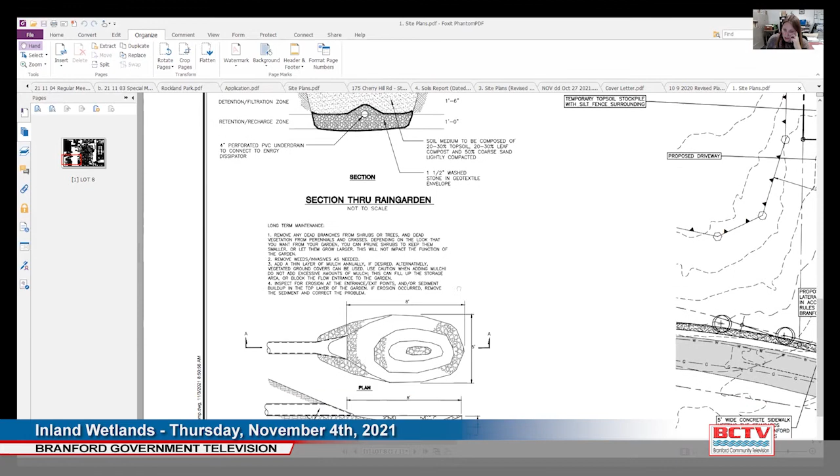Jamie, just highlight where the wetland is, if there is one. Jamie Frederick, Inland Wetland Agent: Todd's Hill is at the bottom of the page, and behind the house there is an existing footing drain, and this is the current rain garden location. The wetland is located on the west side of the site, pretty close to where the footing drain outlets. So what they're proposing is to move the rain garden back towards where the footing drain outlets and have an under drain that also discharges at an energy dissipator. They have provided detail for the rain garden with the under drain and also a detail for the energy dissipator.

So my question for the commission is, is it okay for me to approve the revised rain garden location as a modification to the single family residential house development permit? The activity is pretty close to the wetland. It's on the opposite side of the footing drain, and it's concentrating the stormwater discharge a bit more than what was originally approved.

But I know the commission was originally concerned when this process started with ponding water on properties, as is the issue. I did talk with the engineer for the project briefly. I do think there's a bit of modification or additional information needed before it's approved, but as long as I get that information, it could possibly be a modification of the approval.

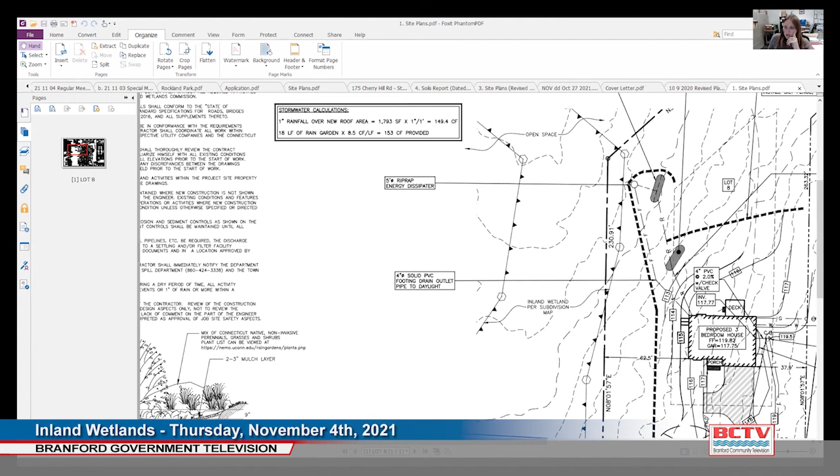My main concern is the elevation of the under drain relative to the elevation of the energy dissipator. There might have to be a little bit of tweaking regarding that, or changes in some of the information. Also, this footing drain elevation is based on what was proposed and has not actually been picked up in the field, so having that information may help document whether the proposed location is feasible as proposed or if it needs minor modification.

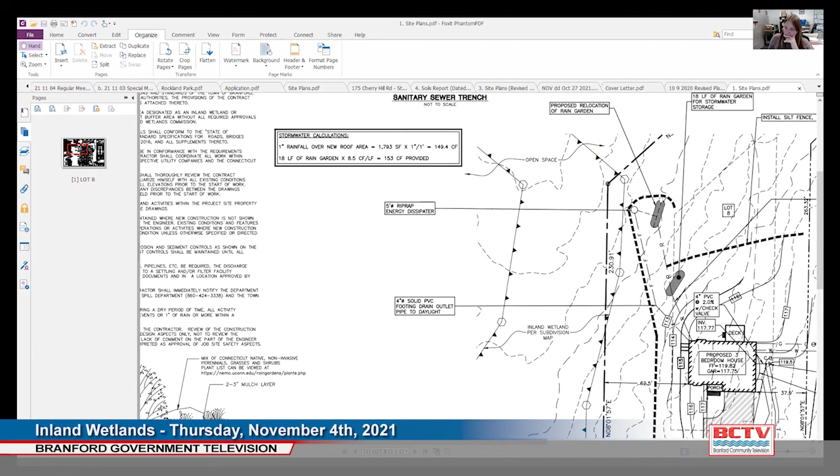Commissioner Basserman asked: because it's a modification to an existing permit, can't it be agent approval? Jamie Frederick, Inland Wetland Agent, responded: based on the way the subdivision was approved and the way the individual lots were approved, this was an agent approval. However, I'm bringing it to the commission just to get confirmation as to whether you're okay with me doing this as a modification to that approval I've already issued, once I have the information I need.

To confirm that it's not going to back up and actually fill the rain garden, because the activity is so close to the wetland and it's adding the direct discharge going to that area adjacent to the wetland. But you did say that this was an agent approval for the lot? Correct. Okay.

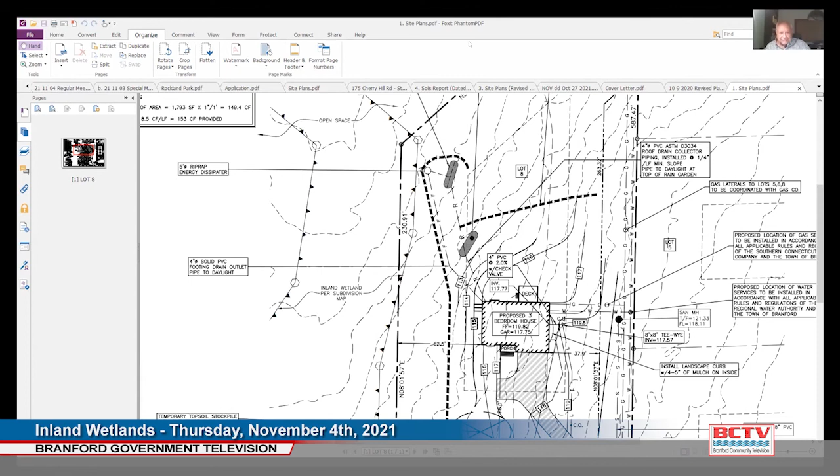So I think from my standpoint, if we get the additional information, you're okay with it. It seems like the current situation cannot continue to exist, it needs to be corrected, and this appears to be an appropriate solution.

Anybody else feel different? You got what you need, Jamie? Or do you need a vote? No one said anything, it was all head nods and I couldn't see everyone, so I'm assuming since no one said otherwise, they're good. Does anyone feel otherwise? No, I do not feel otherwise. Hearing silence, you're okay. All right.

All right, so I will be in touch with the property owner and with the project engineer to get to a final resolution.

Next up, our 2022 meeting schedule, which was part of the package. Anybody feel differently about the schedule as proposed? I think there's lots of work to do, and we're trying to hold to one meeting a month. We do have a draft agenda with two meetings a month available if the commission wants to look at it.

No, just this commissioner, but two things. One, just wanted to make sure that this calendar was checked for major holidays. I'm assuming it was, but just asking.